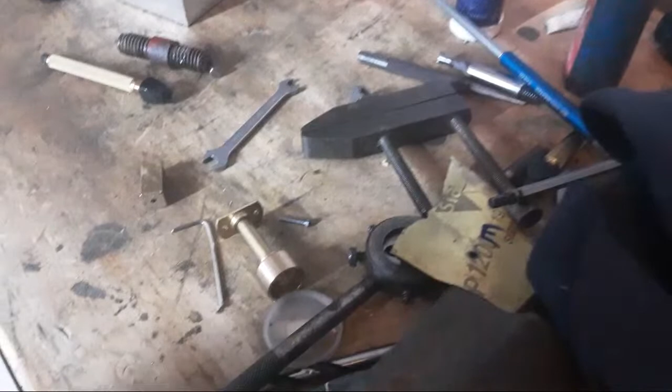I was just messaging my mate Goff. I don't think my mate Mark, I'm not sure he knows about the live stream, but anyway. He sent me a lot of Fowler roller pictures if anyone's interested. Yes, the one you posted photos of. That's what we need to know about. Anyway, you sent a lot of pictures. That looks like probably some bearings out of the stupid thing.

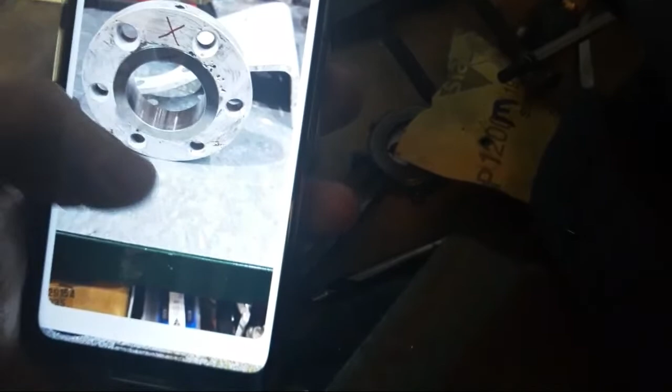Looks like transmission bearings of some sort. Yep, something to do with the back end. Gear supports and things. So there's another Fowler roller that's being built up here in Brisbane. So lots of work being done there. Alistair, pretty keen, I'll have to have a look.

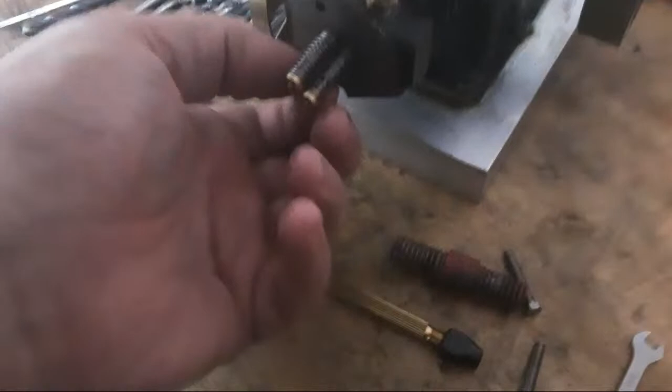This has been a bit of an ordeal getting to this far with this cylinder head. At this point I'm pretty pleased with it, I'm not sure, that's subject to change. But this is what I've done all weekend, which is a bit slack. I soldered up this muffler, silencer, that's all fixed, it's in place. Made a copper washer, I don't know if you can see that.

Alistair, I've got 1,000 questions, but now probably isn't the time for them. You will get bombarded with them once the video comes out. Sorry.

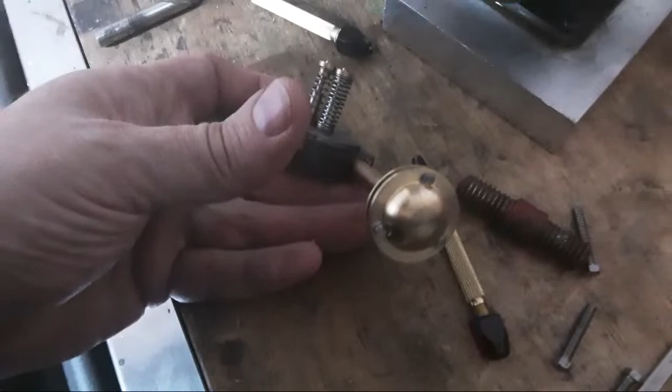Made a copper washer with a spark plug anyway, and made up a couple of valves, or 3 valves actually, because one of them didn't last, didn't make the journey. These are a bit challenging. I made these ends and I've made up the new springs.

Getting some pretty ordinary focus situations here. So I had to cross drill these for pins. They're 3/32 - gosh, my nails are bad. Give you some idea, these are 3/32 and they've got a 1mm, or 40 thou, hole in here, number 60 drill.

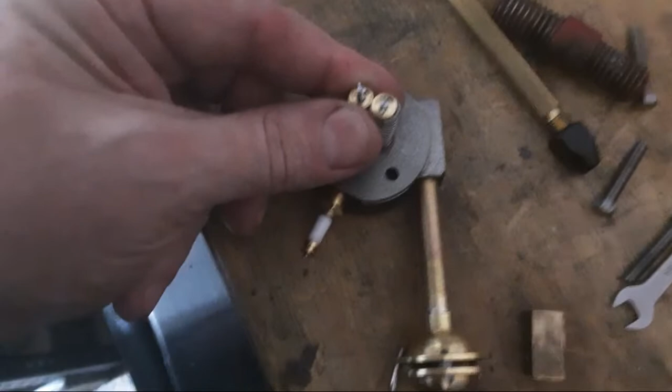Hey Chirpy. So I had trouble drilling these for these pins, I really had issues with that. It's not a very easy job, and I stuffed one valve trying to do it, which is par for the course for jobs like this. Don't know where the damaged one went, it's here on the bench somewhere. It was, I probably tossed it.

Here it is, here it is. Right, that's what the valve looks like. And this one's got a lot of burrs on it, and it's got a bit of a bend in it, which isn't good. Hey, Journeyman Randy.

So the problem was I tried to drill this crossways and never had any luck with it at all. Ended up drilling halfway through the end of it, not good. So I gave up on that, made a new one. These are machined between centres because they've got to be spot on concentric, like fussy concentric.

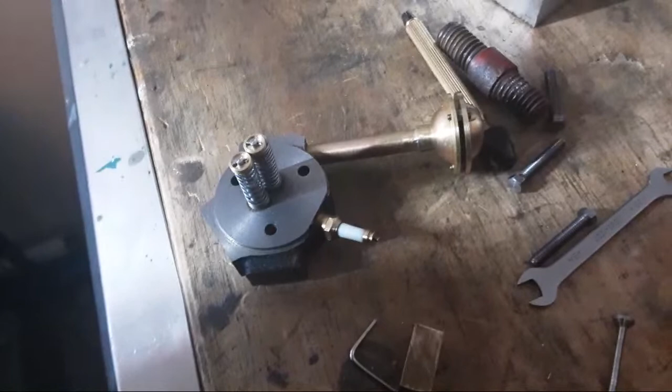That's what I did all weekend, more or less. Oh, there's other things I did too, but to be honest, by about 4 o'clock Monday afternoon, I was thinking I was about to give up on this project and go and do something else for a few months, because this wasn't going well at all.

But it's looking good again now. And today's been one of those days. I'm probably bouncing off the walls a bit, so it's all good.

Just got to decide whether the next job is to make a hone and sort this bore out, and the external hone to make the piston and conrod - whether that's the next job, or whether I make some of these levers. Now, I believe there's probably a few castings missing out of this kit. I don't know.

So there's lots of bits like this, which are going to be fun to fabricate. But we'll get there. I might even get them cast in brass, but I don't know if that's really the answer - I think we'll just fabricate them up as steel.

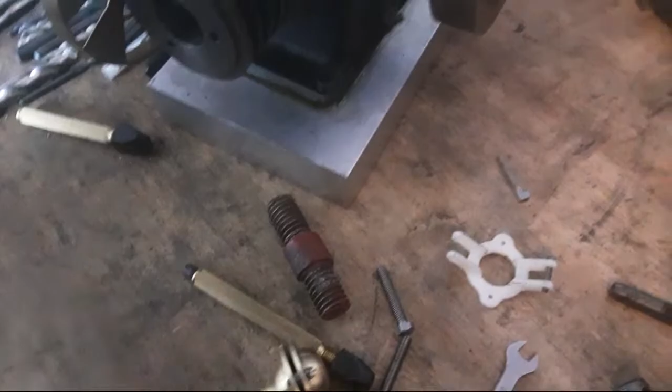So that's how that's going. I don't know whether to make this and put the piston in now so that we can probably get some compression, or whether to actually keep on with the levers and leave the difficult bits like compression till later. Don't know. There's 1,000 bits to make.

There's not really - when you look at the drawings, there's only about 10 more assemblies to manufacture, or 10 more parts to manufacture. Some of them have got multiple parts inside them, and there's a bit of work in some of them. But I think there's about 10 parts left.

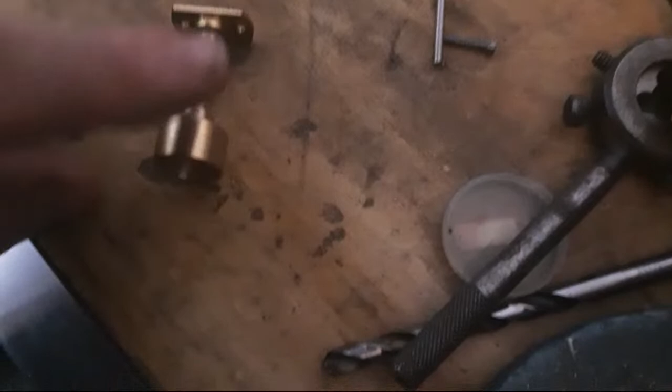This is the start of the carburetor, or the mixer. This is one of those fun bits. This has got to have - oh my gosh, where are we here - this has got to have a 30-degree bend in here. Still working out how to do that. It's got an orifice there for the venturi.

And this is the choke bolt on the bottom, and the flange on the top. This has a bend in it, and then that bolts on here like so, something like that. But this is straight up and down. So that's one of the parts.

So, Christian, how's yours going on? Any closer to being finished? You could end up in here, you get asked all the difficult questions.

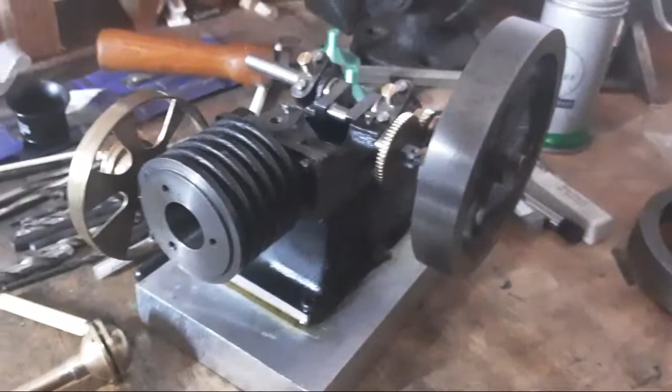So anyway, this is getting a bit closer. I had to pull all this out because every time I do some machining on this, I always get grit back in this crankshaft or in the assembly somewhere when I reassemble it. It's a bit of a problem. It's one of those things.

I think it's pretty good. It's got a bit of a rumble there, so it might get tight - it's just bolt tensions and things. It's a bit fussy.

But every time you pull it apart, you've got to clean it. I've discovered this stuff is probably the best - just to clean all the crap out. Bit of pressure behind it, but it's a bit fussy.

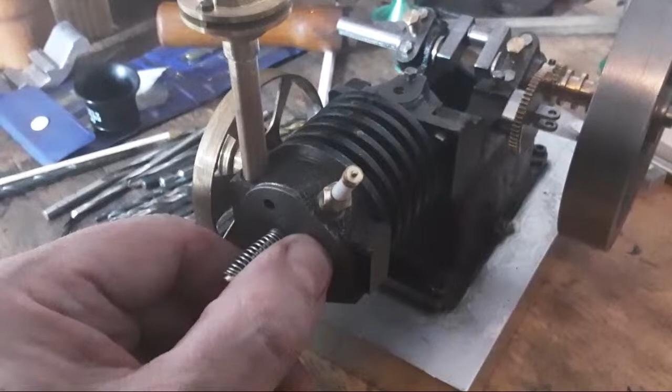Anyway, lots to do. This needs some more machining work in here. This bolts on here, something like this, with the chimney up and down. I'm so sorry about the shaky phone. And then the pushrod bolts on the side of that and on the side of the block. So it's starting to come together, but there's a bit of work in it.

And at the moment, I've really got to give this a break for a week and focus on some jobs that are here. In particular, boiler jobs. I've got to get that starting valve finished, and I've got to get that blowdown valve sorted. So that's the next couple of weeks. And to do the starting valve, I've got to make a trip to the foundry. So there's a few jobs to do there.

I actually thought I was going to do this last night and got sick of it and never bothered. But I'm all set to set this up on centre. I found a mandrel to set that up so that it's somewhere near centre. Be close enough for this pulley. Mount him up on 3 parallels with clamps and run through it in the mill with the boring head to bore this out to fit the concrete mixer. So that's one of the jobs.

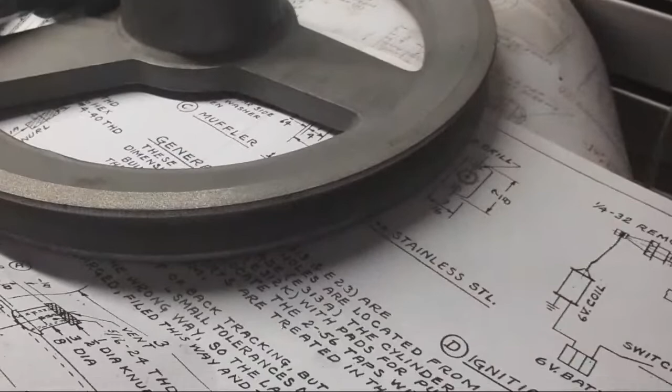Kimberly, g'day. Hope you're doing okay with that mill. Every time I see a video, I dread watching it because it all looks a little bit intense and scary. Anyway, that's that.

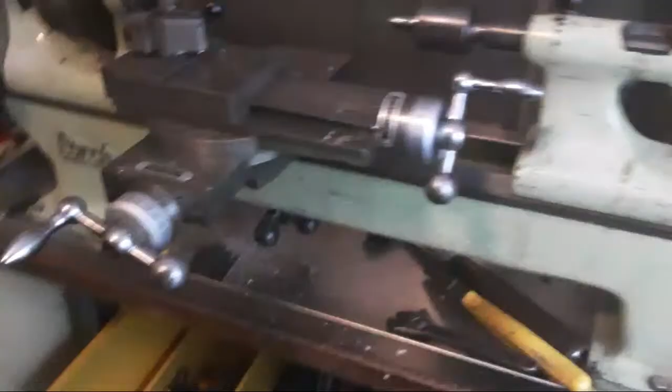Alice here, just so you know, this little lathe, hopefully you've got a nice slide. That's probably as nice a one as I've ever seen. That's 1960s. And it is Lorch. That's written on here. We'll turn that round there. It's got Lorch there. This is a pretty nice slide, this one.

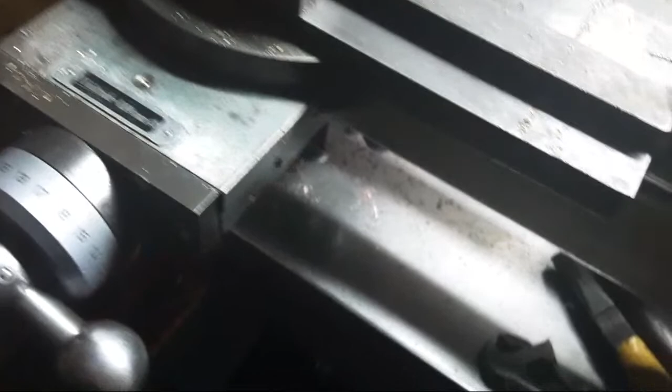Really pleased with it. It's not anywhere near finished. I had to rebuild this one. And probably that's where it falls down a bit, because this has all been remade. But now it's good. I'm still going to put a slot in here for the kick out for the power feed. I've been using the thread cutting attachment for winding springs this week. Springs are pretty simple things to make. You've just got to have the diameters right.

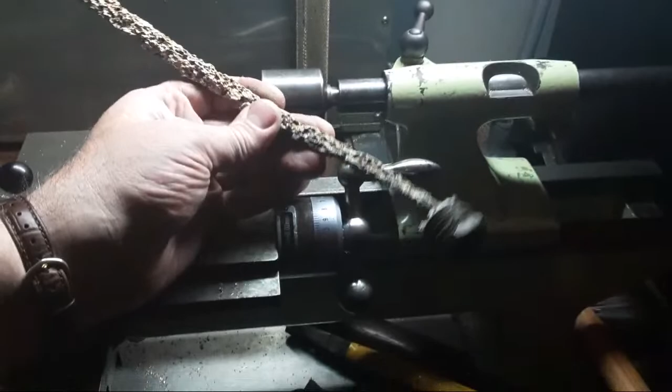I've ordered a couple of these, which are the magnesium or zinc or whatever anodes for a hot water cylinder, basically. And these go in the tender of the roller, just so we know. There's a couple of them on order, so they'll be here.

This was a replacement. This came from Germany. This is the one I've rebuilt a couple of times. I've put a new cross-slide screw in it. I've rebuilt all the top here because this was just rough and it had a hole for a stud that was in the wrong spot and it was a bit ugly and had an awful old tool post on it and stuff like that.

So I've actually blocked up that hole for the stud, which is probably the original hole for the stud. I think it's a stupid place to put it. It's a bit of a nuisance there. It might have been the positional hole for the tool clamp, which might have come over this way a bit further. I've redone all the oil ways, so it's got actual ball tip oilers in here to oil all through the inside.

Put a new screw in this one, which is 2 millimeters, but instead of being square, this is now trapezoidal. So fixed that, and yeah, there's quite a few improvements here. I've also done this. Gosh, can you even see that? Sorry. We'll try that. Put this castle nut on here instead of on the end of the shaft. So this has got basically an extra wear surface in here.

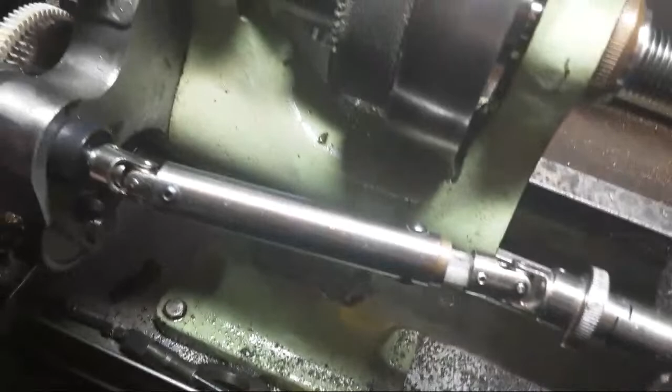So this isn't anywhere near finished, but this goes in there like that. And then this goes on here like so. And drives that through change gears. This is set up for the same pitch, the same amount of turns, 2mm pitch, for springs. So this does basically the same revolutions as this when it's in gear. If we put this in gear, there we go.

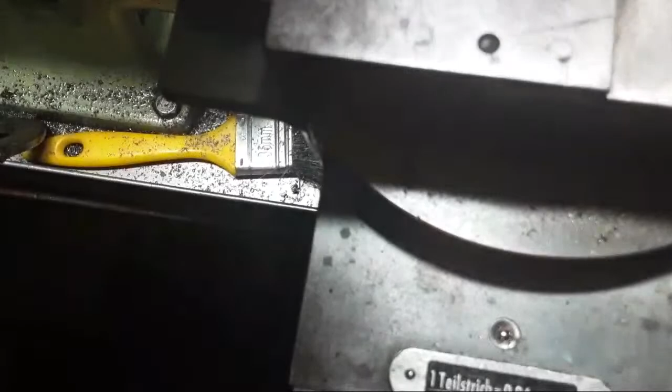This we're still working on. Every now and again I actually use this attachment, and I think, gosh, I should finish that. The old girl's looking pretty lived in and used at the moment. But I'm going to do a similar thing here with a ball detent and just a pin. A similar sort of thing I made here. I'm not sure if this is actually what we're going to use yet. Probably not. But basically that goes on here. And we're going to put a slot in that, I think, for a roll pin halfway through this shaft. And this basically will click in place with a ball detent on the shaft, so you can click it in place, or you can just disconnect this to put away.

This is my design. It's not finished yet by any means. It's a project that I've been working on for, let's find some light. Here we go. I guess you've all seen this. I'm a bit passionate about this as an actual device. This is the oiler for this shaft here. This one here is 3 position with a tumbler for reverse. And that gives us a reverse and 1-to-1 to this shaft here. Down in there.

And then there's a banjo here that basically locks like that. And this is just an idler gear between here and here, so that gives us 1-to-1 here to here because they're both 40-tooth gears. So there's a spacer bush on here.

These are all, gosh, sorry about this. I started with my tablet the wrong way up. I think if I turn it over, I'm in trouble.

These basically just unscrew, whichever one. They've got flats. See there, you can see the flats probably just. That one's not actually engaged. Maybe it is now. Yeah. So there's a flat that fits in the slot. It's not engaged. It's popped out again.

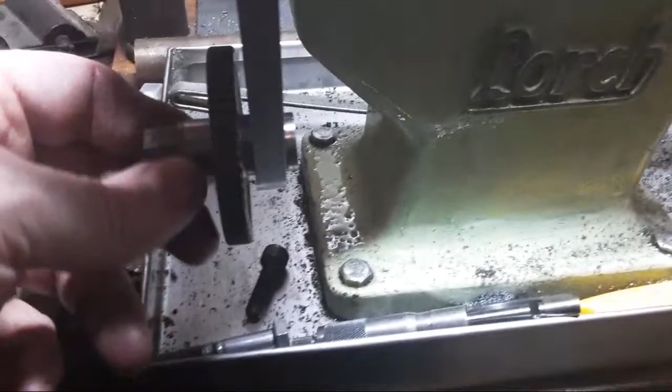Maybe it hasn't. But the theory is that you can do this up without actually getting to the back of this, because this slides up and down, and this screw's actually fitted in there. And then there's a bit of pinch on the shaft, so it tightens up through the front, and then it doesn't tighten up on the bush through the centre. And these have got a bush here, which you can take off and you can put a spacer in another wheel.

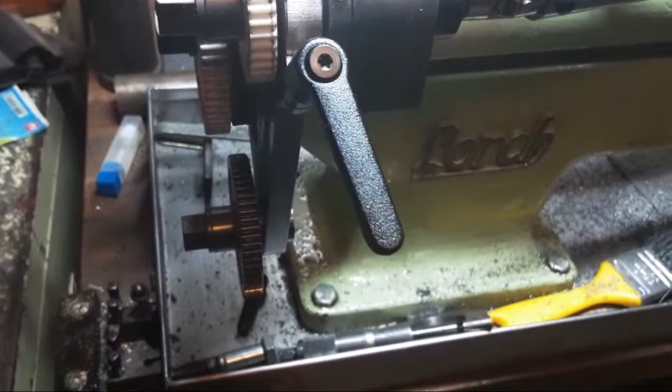So still a work in progress. Still got to put a cover on it because it's a bit dangerous like that probably. I've been saying that for 12 months, 18 months. Probably 2 years or 5 years or something. But anyway, that's all work in progress. And I'd very much like to get it going. But

the other feature that this needs is a knockout for power feed, so that you can set a stop out here. I'm just going to put basically a groove in here, and then a bit of something with a little bit of pinch on it, so probably a bit of 1/2 inch by 3/16 or a bit of 12mm by 5mm or something through here, with a stop on it to kick behind there, so that when it gets to the end of its travel, it knocks that off the dog clutch and disengages it, hopefully with some sort of repeatability.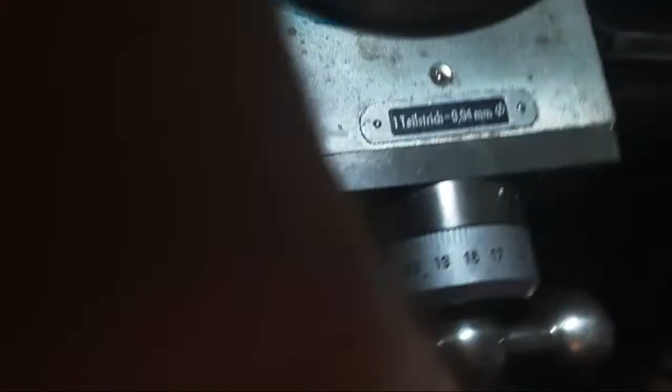And have this adjustable, whether you set it with a ruler or probably put some sort of micrometer head on it or something. I've got a Mitutoyo micrometer head I'd like to put on it. I don't think that's the answer. I'm not sure. I've been trying to think about that. But I'm just going to put a pinch clamp on there so that when you adjust it, you can clamp it down and it'll pop this basically off the end of the dog clutch and kick the power feed out up to a stop. So that's the theory with that. Anyway, it's a project.

And it's an ongoing project. This poor thing needs a clean up again. It's had a pretty heavy weekend. It's made valves and springs and mandrels and caps and all sorts of things. I did clean it already. I did give it quite a comprehensive clean about Friday. It was Saturday night, something like that. Sunday night, probably. Sunday night, I think. But it's all dirty

again. Alistair, what is the collet size in your lathe? That's something that interests me a bit. That was one of the questions that I can't resist asking. Is it an A2 or is it A3 or A4, A5, A6? Interesting. I'd like to know what the collet size is. 12.5, so it's an A2. I know.

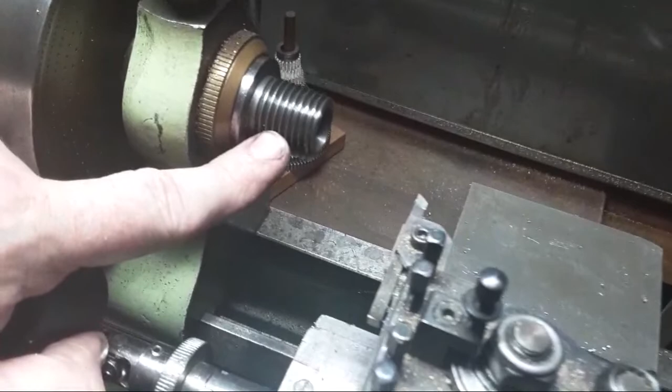This is inch 10, so you know. When you're trying to work this one out, because you don't ever look for odd things like that. But this thread here is inch 10. This is a nose protector for that, which is 3D printed actually.

This is my collet collection. Half reasonable collets. I've made these racks and 3D printed them, and I've made these little thread protectors because it is an odd thread. Some of these collets are a bit rough. Some of them are alright. It's 11.5 by 1 millimeter, this thread on here.

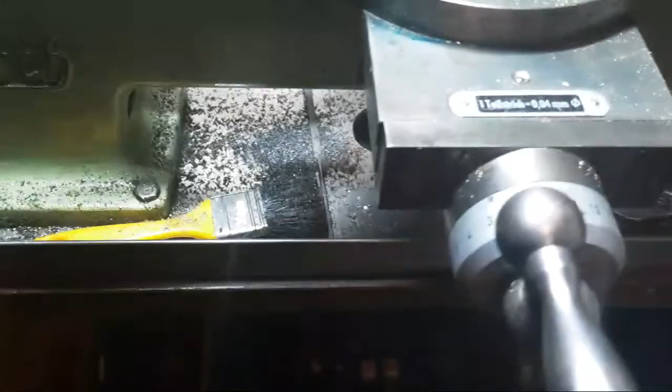Anyway, I would like to find or make some more collets and accessories and things. I've got lots of bits and pieces for it, but I'd like to do some more. Probably if I get some of these roller bits finished before I get this engine finished, I'd like to make some more bits for this. Now I've been using it, I think, what a pain in the neck not having that set up properly. And it wouldn't take very much to set this up and finish it. Get at least this part finished.

Another thing this needs is a screw on the inside of this bush, into the end of the square, so that it doesn't fall off the end. That's kind of one of those things. Just ask Alistair anytime. I kind of know most of those threads off by heart.

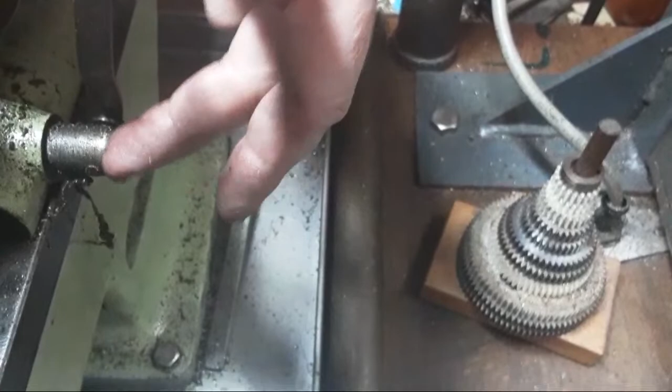But this thread here, in here, I think it's 1/4 inch Löwenherz, which is 53 degrees, something like that. Some stupid crazy thread that one is. No idea why. The threads that hold this in place and the tailstock in place and the headstock in place are actually 1/2 inch Whitworth. There's another absolutely mind-blowing fact about these.

This thrust bearing is not really easily available. We used the grooves, and we couldn't get another carrier for the balls when the thrust bearing wore out. It was getting a bit crunchy. So we made a new ball carrier with holes in it out of industrial plastic, that yellow industrial plastic there, whatever that's called. And put the balls in that and put it back together. Now this has run a lot of hours without it ever being a problem.

That part of the headstock, there's just a flat on the casting. Like across here. Thanks for the update, Mark. Ah, yes. Now, the little one that I used to have, the little L, that had a flat on the casting.

This might have been an optional. I don't know if you can see that, there's an index wheel there, which this operates on. This is a new index detent that I made. Basically, the spring-loaded detent, spring steel, which operates in there on the index wheel. Löwenherz, that's what it is. That's the thread. I've got to look that up every time I ever want to know.

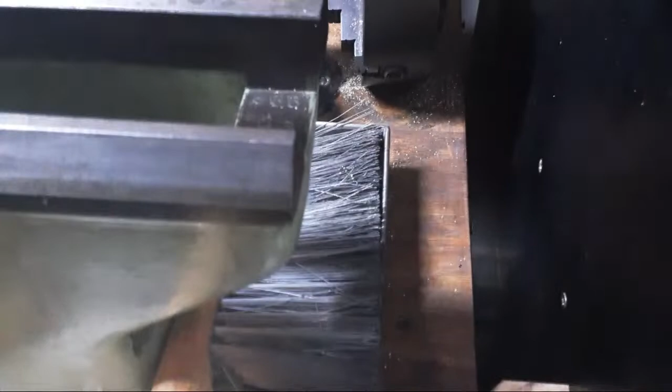This head, I believe, is a fairly early one. This could be 20s, but it's about the first of this particular bed. Now, there's matching numbers. This one, and the head and the tailstock. And the numbers are usually here on the end if you want to look. I don't know if you can decipher them, but there's the numbers. I'm not sure if they mean anything, and there's no way of looking them up if they did. Generally, the numbers are matching. There's another number on one end of the headstock here.

Anyway, there's a collet that no one's put away. It's about 2.5 mil. So it's 25 here.

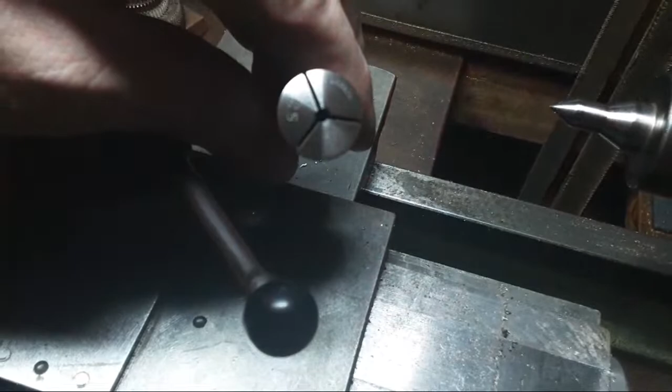Not sure you can upload a picture to chat, but I'll talk to you about it at some point, Alistair. Give you time to unpack it.

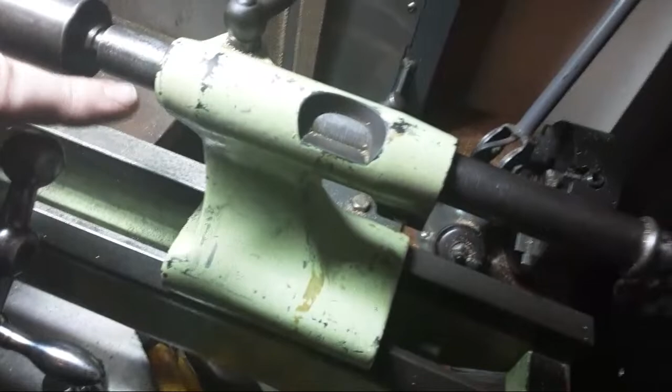Now, things that I would like for this lathe, right? If anyone's looking on Marketplace or whatever in their local area and they see bits for Lorch lathes and you don't want to send them to Alistair, you want to send them to me, send me the link. But things I would like, I would very much like a new spindle for this tailstock that's Morse taper 1. I've actually seen a Morse taper tailstock that's much later than this, and probably I'd lift this off and put a Morse taper tailstock on it at some point.

I would very much like, there's books full of accessories. There are things that I'd really like. Anyway. Matt, the big mill's out the back, we're using it pretty consistently. We had a bit of a walk through of the other workshop last week, I think. This old girl, it's been nearly 20 years since it was painted, so it probably could do with another clean up. James, that's right, you don't need to get Lorch curious. It's a nice platform for other machines. I'd really like another one of these headstocks.

Because if I had a headstock frame like that, crap, I was just seeing if there was a message from Alistair. No.

If I had another one of these castings, I would chop it off here and put a pivot point in it and make a rose engine out of it. Did I say that out loud? Yeah, I did. That's what I would do. I would actually round it off here and put a pivot pin all the way through here and here. Right, I'd make another carriage to go over the top that swings backwards and forwards, and another spindle on that carriage with a slow speed spindle with a rose index here and a bumper along the front. I've got it drawn out. Hasn't happened.

There's 25 on the cross slide. Maybe there is. Mine hasn't got any numbers on the cross slide, but this is off a much later machine. I don't believe that this machine probably even came with a cross slide. It'd probably come with either a tool rest or a part off slide or maybe a turret, something like that. I don't know. I have 3 or 4 of these slides. None of them are much good. I've got a Stark from the USA that's half reasonable and would probably do up. I've got another Lorch, which is a really very early one with the screws out on the outside of the slide. I've got a couple of unnamed ones. I'm not sure there's any numbers on this one.

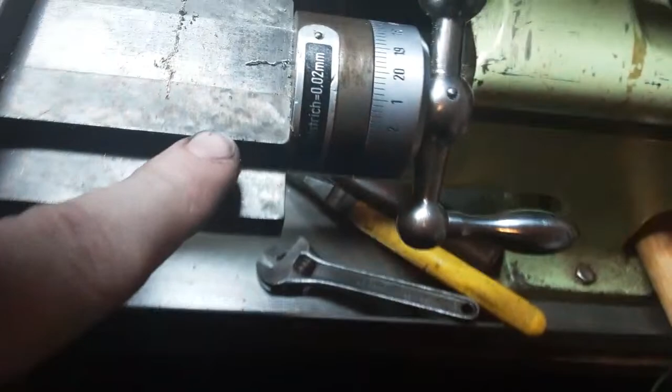So anyway, this is a bit nice because this is all ball bearing and it's repeatable and it's pretty sweet. I'd really like to re-scrape this one. The other one's pretty good really when I had it apart last. It's not terrible. But I'd very much like to re-scrape this because it's a little bit loose in the last inch, which is all you ever use of this. And I think it would clean up pretty well. There's a few score marks you can see on the camera. You can't really see them in real life. So at one point I would like to do this. This end's still got scrape marks in it. It's not a very big slide, and one day I'd like to do that. See how we go.

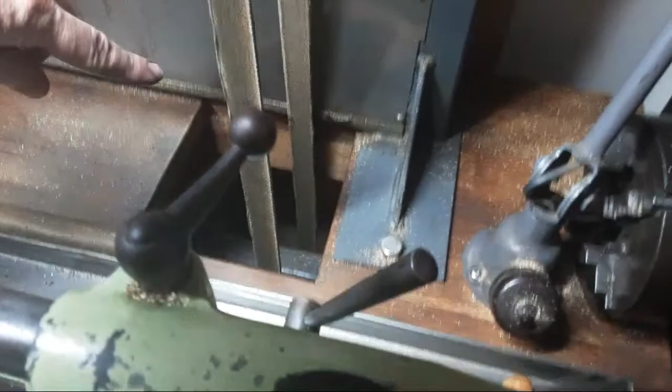The other thing I'd really like to make is a cover to go around here in cast aluminium over this belt, like up this far with Lorch on the front. I think that'd be really nice. Just a matter of making a pattern and doing it. Yeah, this has got millimeters in here, which is kind of good, except the dirt and stuff goes in there. I'd very much like a Morse taper one of these. This is much, much earlier, as you can see here, than this system here, which is what the later ones would have had. It's a very similar handle. A little bit more elegant and Victorian, I think. But very similar.

And this is all ball bearing, whereas it's got an actual oil hole in it here. This is a 1.2 degree taper, Alistair, so you know. Now, there's a piece that you're probably missing, which you're going to have to find or make. Right. This is 1.2 degrees.

And that's the Lorch taper. There's a rod in here, a loose bar, right? Which I've always thought I would like to put one of those spring detent screws in to stop it falling out, so you've got to actually give it a bang or hit it or something to get it out, because every time you take this tailstock off, you lose it. But there's just a loose rod in here about that long, something like that.

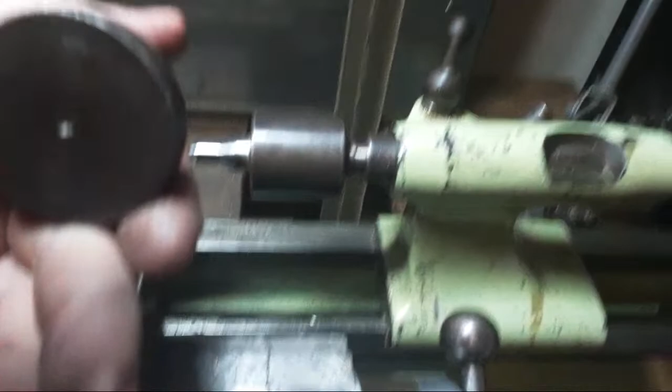See, I've got bits like this which are actually original Lorch. It's probably got Lorch written on it somewhere. Don't know where. That's a flat, I guess, drill standard, or a drill table. And that's the right taper, and that ejects with this system too.

Did make a new arbor for this drill chuck, so that's actually a made from scratch arbor. It's a nice fit too, but that's sort of what it looks like. I've got other bits too. Actually bought this ER16 collet chuck with the idea that I was going to put an arbor on this, but it's hollow all the way through, so it actually won't work. At some point I might still do that, but not sure about that.

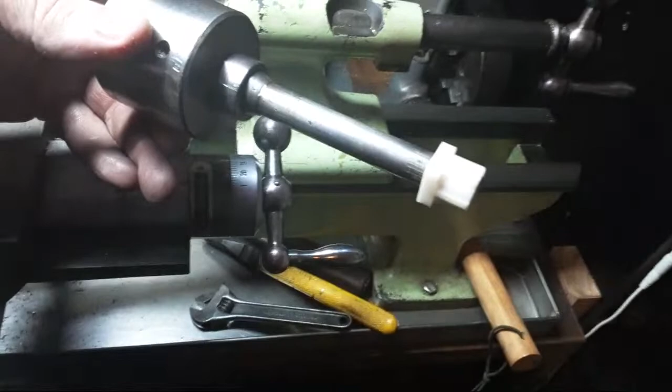But I've got this, and whether I was going to convert this to put in there, or whether I'm going to hang on to it in case I find another tailstock, I don't know. But this is pretty nice, but probably this is better. A bit more modern. It's got an oil hole there.

Anyway, lots and lots of accessories. You end up picking up lots of bits. You'll find that most small German lathes of this pattern, the bits will fit. Anyway, I'm a little bit passionate about Lorch lathes. I don't know if anyone picked that up. And this has been a project for 20 years, 15 years, something like that. And it's still going together.

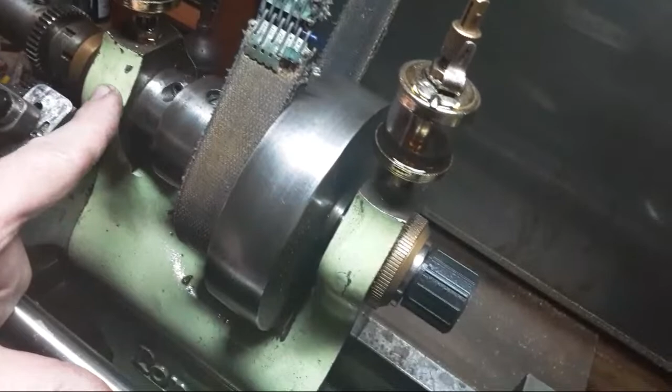I'd like to pull it down and paint it and scrape it and grind it and all that sort of stuff. It's not going to happen yet because it's useful. What it does need is a new drive belt at some point. Poor thing. This is steel on steel in the front. It should be oiled. This is probably steel on steel or bronze on steel in the back with an adjustable piece. If they're any good in here, they should run on oil film.

Grease. This one had grease as well. But when I pulled it apart, this back bearing was basically shot. I've still got it somewhere. I've got no idea where it is though. It might have been over here on this bench. Or I probably put it away somewhere. I sort of leave it laying about. Can't see it. But the bearing was made up out of a couple of rotten old pipe fittings, basically.

Did you say you're buying a lathe, James? Anyway...

It's all fixed, the bearings and everything's all sorted. That's pretty sweet. It's just plain bearing in here, but it's a fairly sweet system, no problems with that, as long as your balls haven't got too many flat spots and the thrust washer's adjusted up right.

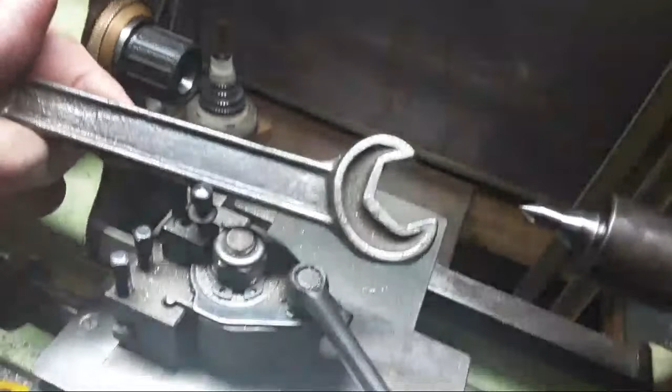Now there's a spanner for this, actually a couple of spanners. This one here isn't for this lathe, I picked it up somewhere in Poland, I think, on eBay. Lorch, Schmidt & Co, genuine spanner. This fits most bits, somewhat. Basically it fits under here if you want to use it. I've also made it so the small end fits all these, so I made all of them the right size for the spanner.

You use this to unlock the headstock or adjust the tailstock up or whatever. The two rear lock nuts there, I'm guessing that's the ones you're talking about. That's them. All right.

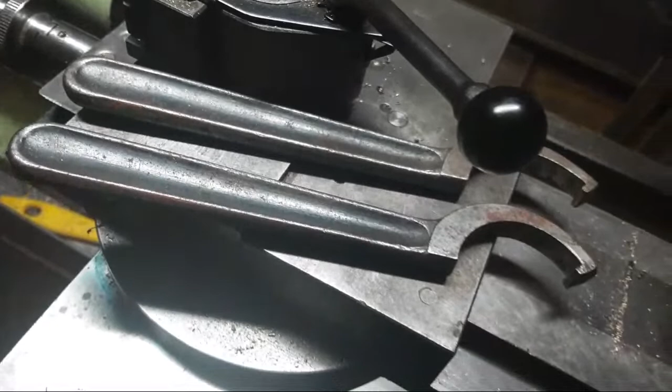The thing's not much good without these. It's the Lorch ones. So that's what they look like. They didn't come with this machine either, it's something I picked up, but that's what they're like.

There's boxes and boxes and boxes, oh well, drawers full of equipment for this, none of which is much good. I've got in and out of ring chucks, things like that.

So there's a key on this bush. This bush here is keyed to the shaft. Now there's a pin about here, which I've actually replaced twice and it's been no good, so I'm going to have another go at some point. But that stops your collet turning.

That's in the shaft. Then this just clamps down with a collet basically, a system in here, and then you do up these bolts. Is there just one or more than one? No, there's three bolts there that clamp that down with a collet. There's a thread here, you undo this one, you can unscrew this and change your preload.

Let me know how you go with the collet pin, the last couple I've made sheared off. I'm still working on that, I think it's going to be softer rather than harder next time. And this is keyed to the shaft, so basically when you move these in, this one moves backwards and forwards, whereas this one just runs straight on them. There's this little oil cover or dust cover on the outside, and then steel on steel, and steel on cast iron in here, so that'll never wear.

Anyway, who's got totally sick of looking at lathe bits? Depending on the length of your drawbar, I think they're all different. If we look at it, there's that one, that's what it looks like. There's that one. See that? Don't know what that fits, but it's different. Whatever that fits, I actually have two of them, so they're probably out of a tailstock or something.

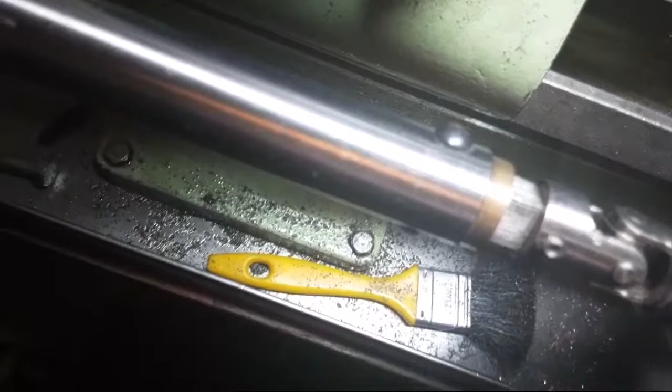Actually the short one, I've got three of them. There's a genuine one as well, no idea what that's out of, but I reckon it's a tailstock. I don't know, it might be a short head. I only got one long one because this is an odd thread, it's 11.5 by 1 millimeter, so I've got to find a tap for that before I make another one.

There are quite a lot of different headstocks. If you look at the book, I've got some serious catalogues. There's a lot of attachments for this, and I think a lot of them probably didn't get made. They were sort of made to order, and I think they were probably designed for specific customers and never got made again or included in stock anywhere, because a lot of the attachments are just wild things no one's ever seen before or after.

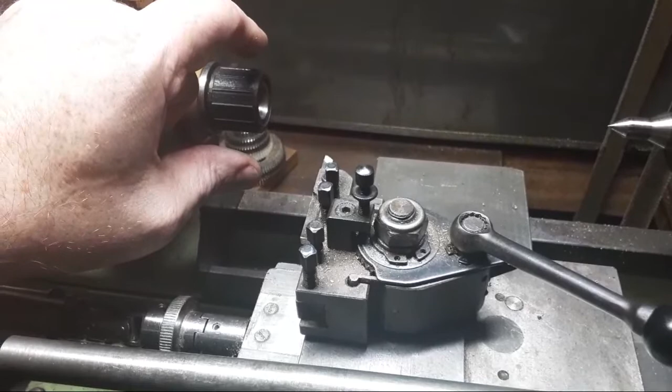But generally the A is the 100 millimeter center height, and the number afterwards is the size of the collet. So some of these had 22 mil collets in them, I think. Like an A6 had 22 millimeter collets, which gives a thread like this on it, and a 22 mil through bore. This is an A2 or an A1, and it has a 12.5 millimeter - I think it's 12.5. I think the A1 may have had a 10 millimeter collet, but that's all conjecture because there's no information on that.

Didn't get to that point because there's a lot more bits in that. So we ended up making this one, which clamps on here too. It's got a lever on the back here which unclamps it, whichever way it goes. There we go. It's on a cam, and it's got a T-nut in here. There we go, it locks that, and that just fits on the bed. See.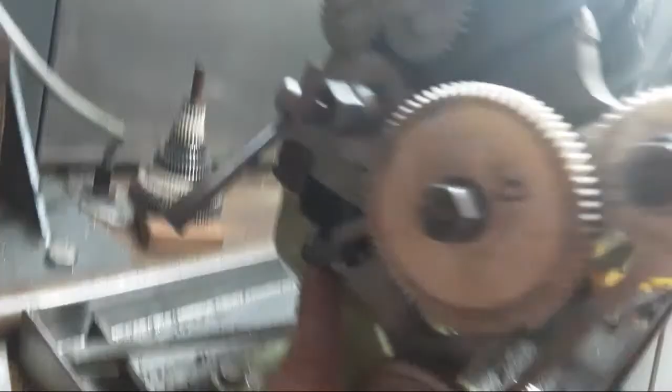This is quite a project because to get these to mesh is a bit of a challenge, but this should fit your machine or anyone else's machine because this just pulls off here. It's got the thread on it, and these are all adjustable. So if your center height's within a couple of millimeters, these are all on cam bushes. You undo a bolt or a set screw and you can move the bush with the cam an eighth of a turn, and that moves it closer or further away to make all this mesh. And then it's got an adjustable plate here for your detent. So that's how that works.

But anyway, Lorch lathes - sorry, it's been all over this live stream, is all we've looked at. Don't do this. Let's have a look.

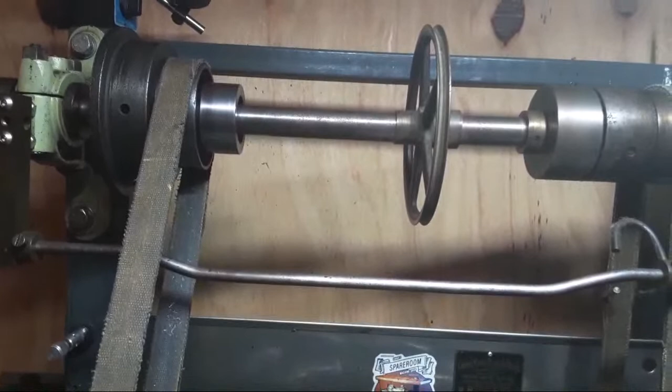This was off a small lathe somewhere in Melbourne, in a factory. No idea. I've made this pulley to match the Lorch pulley because it had a wooden, very, very ordinary pulley on it. Fix that. And these have got nice hangers, and it's got a fast and loose system for reverse as well. And it's got a power takeoff pulley and another couple of pulleys too that are not actually on it. Yeah, this fixes that rattly mess, not a problem.

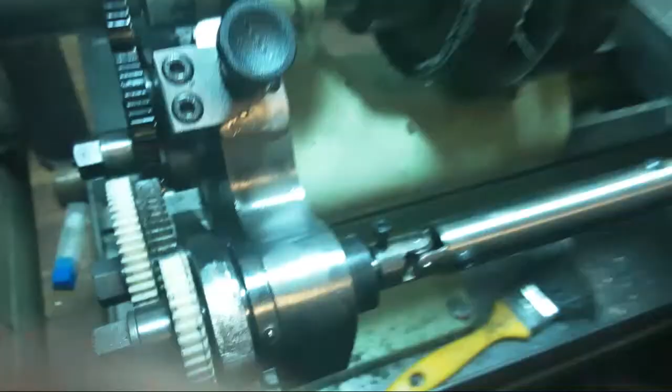I didn't want this gear train to be - gosh, I've got light problems here. I don't know if that helps or not. Maybe it does. I didn't want this to have rattles, and it doesn't, for a couple of reasons. One, these are 3D printed gears. Oh, something's out of mesh now.

There's a brass bush in here, a straight brass bush, and that's oiled through here. And then this locks on the same collar. But this spindle through here is on a cam. And then these ones here are also on a cam so that they lock, so that you can get this to mesh on this one and this one, or tumble across and mesh on the other one, like so.

So there's a bit of wrangling to get this one to mesh here and then through there, and the other way around, and then they've both got to mesh together as well. So a bit of thinking about that, but that's how it all works. That's the system.

But this is - it's really quiet as a mouse. I'm really happy with this, how it's running. Very impressed with that.

So yeah, change gears, James - it's the only way forward. This is a pretty good system. I've tested this a few times. It hasn't done a lot of work in anger because it's not quite finished, and when you've got to cut a thread you actually just end up cutting it. Like, you put it all together and it works, but it's not really finished.

But these have got - basically there's a brass bush in these, and then there's a flat recessed head screw in there, and these screw in, and they lock in a cam bush.

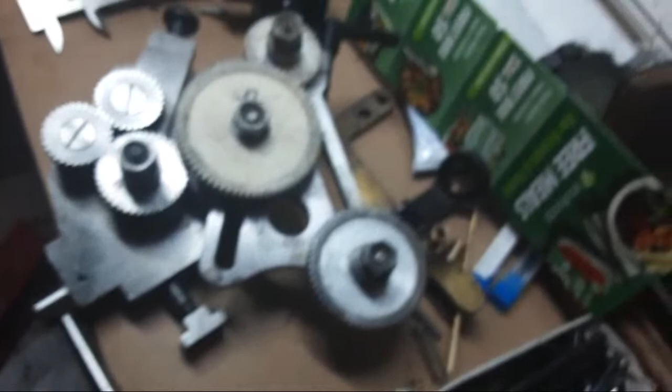So what happened was that these gears ended up getting printed quickly for jobs. That's how that worked. This is just a set of cheap Chinese Sieg gears, and the ones I never had have been basically printed.

That bolt actually locks on this slot, and then there's an inner that locks on this end, so everything's tight against here, and then there's a bush on top of that with a key. These are all matching parts that I've made. These are on cams, and this operates from here onto the headstock.

And this whole rocker mechanism is also on a cam, so that you can actually get this one to mesh with this one, and then this one basically meshes in the right spot. You control the mesh with that on the spindle with this adjustment here on the plate, so basically where it locks in place here, because this one stays mesh all the time.

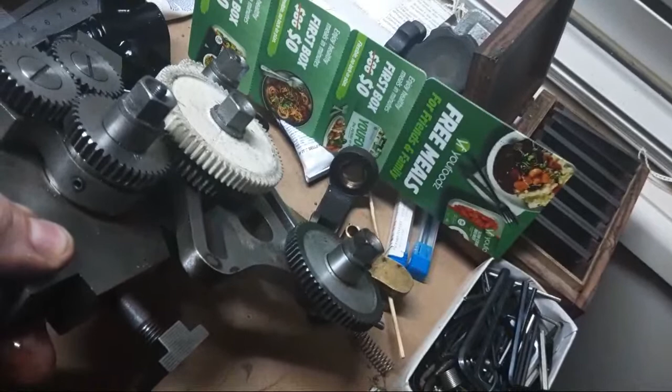Let's see. Oh my gosh. That one actually just done up tight at some point. But if you lift this off, you can actually see this shape here, which has got a cam in it. And there's a set screw in the back there, which also has a shoulder on it that locates in a hole on the cam.

So the cam's basically just drilled with, in the dividing head, 8 or 10 or something holes around. I think 8 holes around it, which gives you a different place in the offset to bring this position here. One of these gears, I think this gear is actually locked in place on this, and then that brings these two into mesh.

This one here is a slide. It's got some sort of slide in it, I think, from memory, which meshes these two, and then this one and the spindle is adjusted from the front.

Anyway, that's the Emma thread cutting attachment for the Lorch lathe. It's not finished yet, but it's certainly well on the way. There are other improvements probably that it could have, but it's probably never going to get them.

What it will get is, when we get that way and we've worked out how much space we actually need on here, what it will get is a tin cover in the back, and probably a cast cover on here with Lorch on it, and a couple of studs with nuts. I think that's how that's going to work.

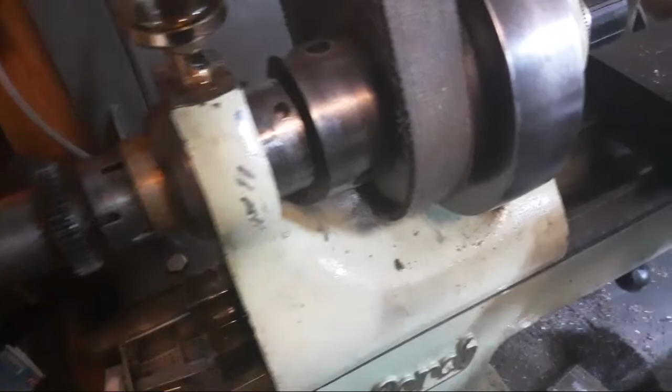I don't know about Oscar Worthy, but it never ever got a proper video because it's never been finished. And when I do finish it, I'll probably pull it apart and make a video and show how it all works. But until that point, it hasn't ever happened. There's still lots to do.

I had trouble with these little washers in here because you want a bit of clearance between your gears. There's a little keyed washer that goes on the bush. I'm going to pull this off and it's all going to fall to bits in here, but it'll give you some sort of idea how it works. It's probably a two-handed job, but I think it'll come off.

There we go. So we've got a nut, right? And then we've got a bush with a key, which matches your wheels. So basically there's a spacer washer between. I had trouble with them. And now Joe's got a surface grinder, we might remake all those.

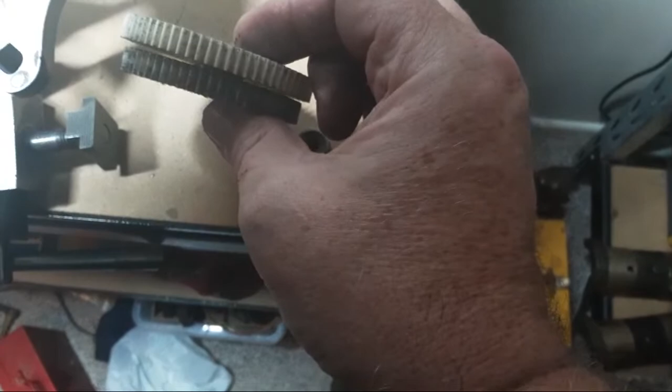So basically that's just a bronze bush that with a key in it, and there's a gap between, see, with the washer. This is basically the spindle that's got a flat on it.

For the slide. Right. Oh my gosh, sorry about the lights, guys. And this one here, which has also got a flat, which you can sort of see. I think you can sort of see that. Probably. But that locks in the back of the spindle.

So basically you put this together, and you can put the nut on it and lock it up. And when you do that up, that'll be tight.

In horizontal like this, it's not really, sorry, you're going to get sick.

So that locks on there tight. And this basically just runs on, it's a fraction short, so there's no nip on it, and that just runs between there and the nut. And this one's the same. This one here is the shaft that runs through, and this thread's actually on the end of the shaft. But it's got the same provision basically, with a key, to be able to put 2 gears on that one if you need to gear it.

Or to be able to put this washer on the back and this one on the front if you need this gear to run onto a different sort of, let's see if we can slide this up. Set these up with just a piece of paper in between to get the right gap. That's just a piece of writing paper. That's the way to set them up so that they're actually right.

And then you can just set this one, you can put different gear on it, or you can move them around, or you can put another gear on the outside. So if you don't want a 40 gear here to get the right ratio, you can put something else here on the outside and then mesh it to something else here and across here and whatever.

Anyway, Aussie Rob, thanks heaps for tuning in. Sorry we've been a bit boring tonight. I'm bouncing off walls a bit tonight, so I'm glad we had a lathe later to talk about.